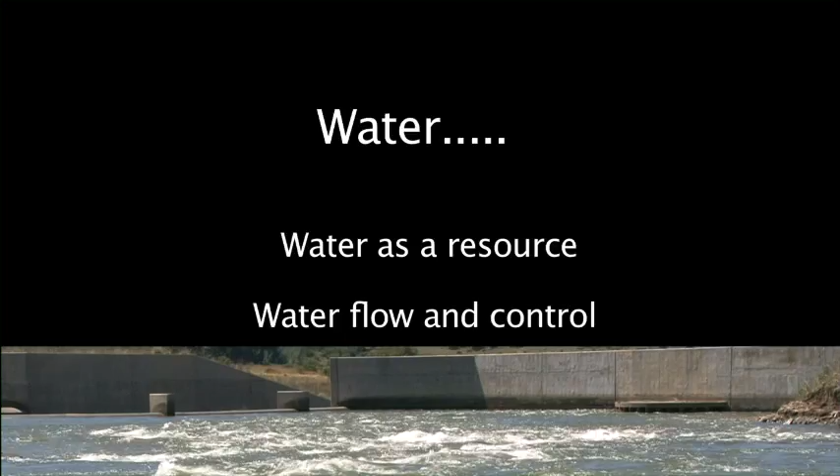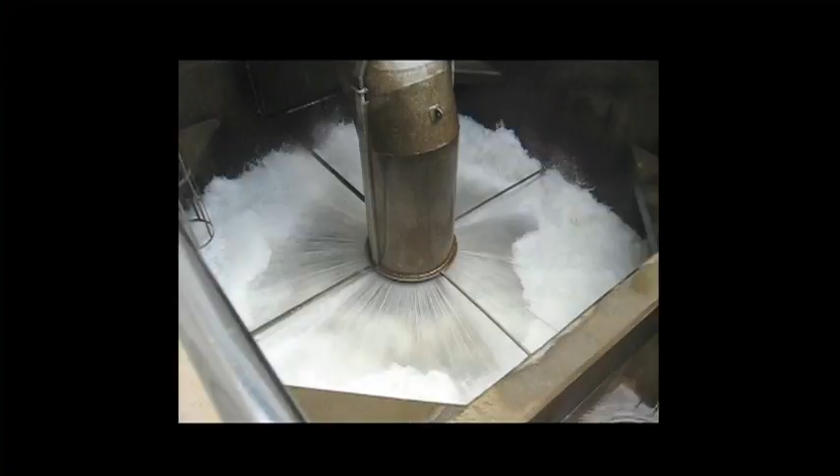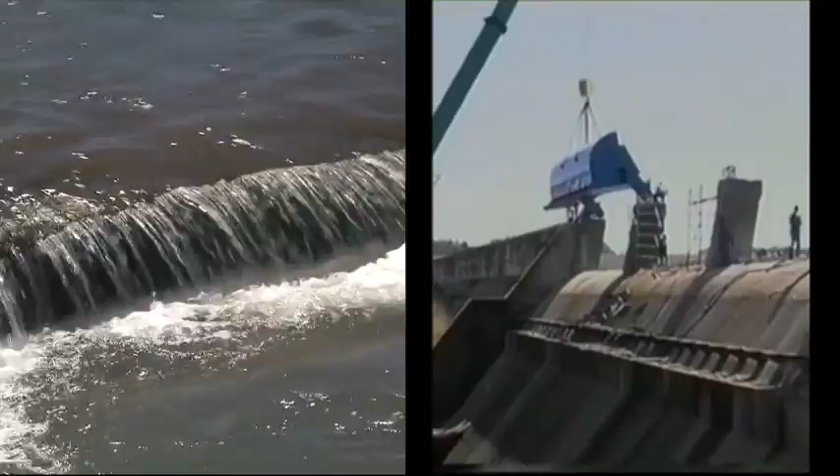I'm Peter Townsend, a qualified civil engineer. I graduated in 1969 from the University of Natal. Most of my life has been spent with consulting engineers, doing a variety of work, broad-based experience from civil and structural work. But more recently, over the last 20-25 years, I've had an interest and a passion for water and for water control. Through that passion, we've developed a range of automatic water control equipment, which is unique in the world and developed in this country.

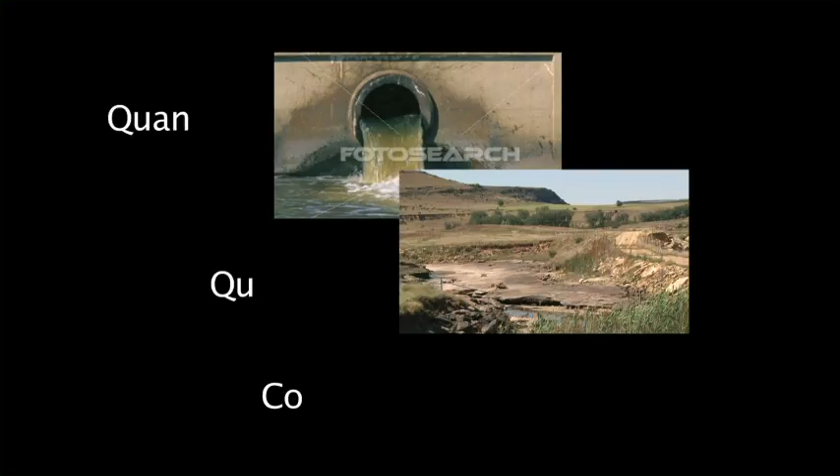Well Johan, that's a very controversial subject because we are in a state of crisis, impending crisis, and it's only recently that the government and the public have realized this and are taking steps toward it. Generally, I could refer to our water condition as the 3 Ks: quality, quantity, and consumption. These are the 3 main areas that we need to focus on, areas where we have crisis in this country. South Africa is not really a water-rich country.

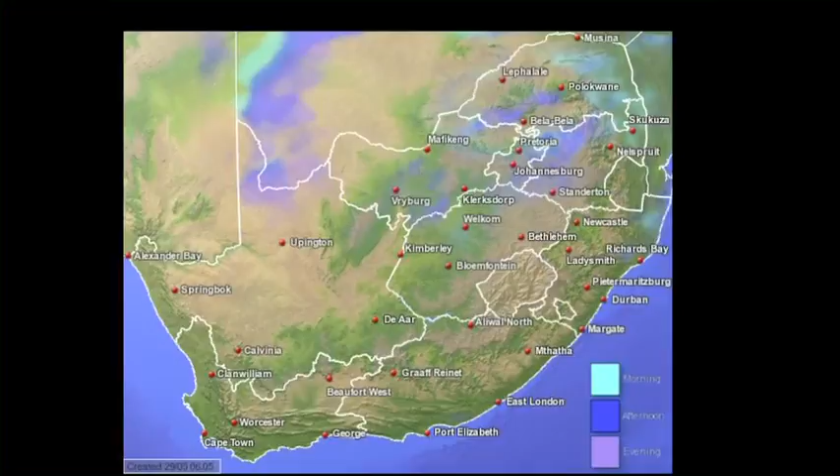We have an average rainfall of less than 500 millimeters across the country, and the water that we do have is usually in areas where we don't need it, and vice versa. So consequently, we are a country which has diverse rainfall going from west to east and to the coast, and we find that the rainfall we need in the dense industrial areas where demand is highest is usually where we don't have sufficient water.

There's an increasing demand in South Africa for water. This is obviously due to increased population over the years, and the government's policy, correctly, is to try and provide clean, safe water to all the inhabitants of this country. That's going to be a large demand on our water resources. Then, in addition to that, there's an increased standard of living, and with that comes an increased water usage.

From the very rural people who have to go and fetch their water from the local stream - they are probably the most efficient water users - to the affluent environments that we have in urban areas where water can be irrigating on the lawns day and night. So with the increase in wealth and living conditions goes the increase in water consumption.

Yes, there are figures that have been bandied about, ranging from 2 to 5 rand a cubic meter, depending on the size of the desalination plant. It is very energy consumptive, although the more recent technology of reverse osmosis does have a recovery of energy. But nevertheless, it is a costly exercise - a costly process to get water from the sea, more so than water from dams and from rivers.

What skews the public perception at the moment is up here in the Gauteng area and the Highveld area - we've had good rains this year, extremely good rains. It's very hard for people to imagine that we're going to have a water shortage. However, in the Eastern Cape, Port Elizabeth area, they are in the grips of a dry period. Their municipal dams are only sitting just over a third full, when they should be substantially fuller than that.

And so that is the problem in this country, that we have this difference in areas - some very wet, some very dry. In this area, which is the hub of the industrial area of South Africa, it is predicted that we are running into a problem in that we are already exceeding the capacity of the Vaal River system.

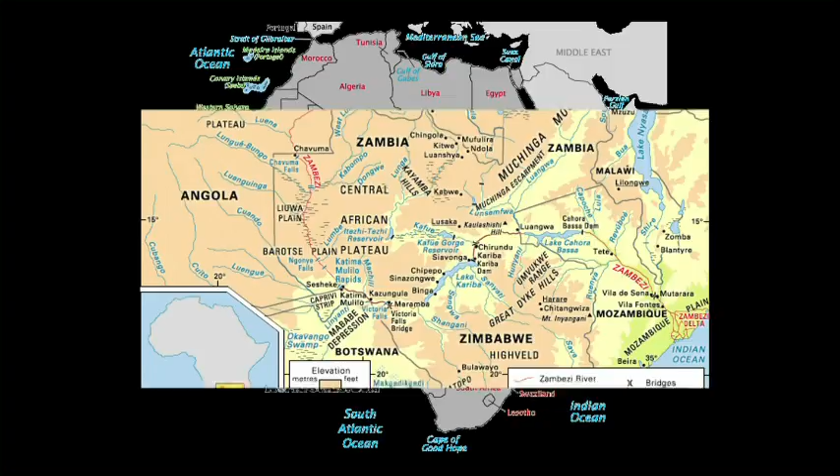And we may have to look north to our northern countries where they will get more water. As far as global warming is concerned, the pundits, the climatologists, are predicting that we get less rain for areas south of the Zambezi and more rain for areas north of that. Already there are indications in some of the rainfall and runoff figures over a long period of time that we are getting less rain, and in addition to that, more severe rainstorms. So the intensity of the rains is increasing, and with it come other problems associated with runoff and floods, etc.

The quality is constantly deteriorating, and there are essentially 3 or 4 sources that contribute to that. The one that is most topical at the moment is acid mine drainage, which we can talk about a little later.

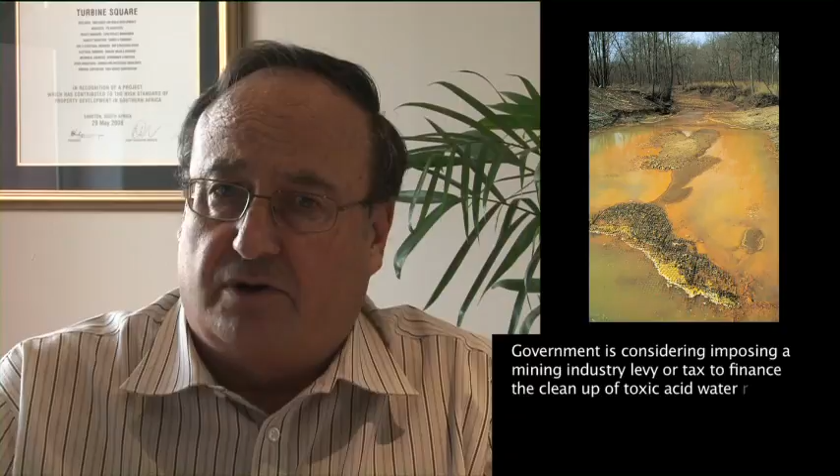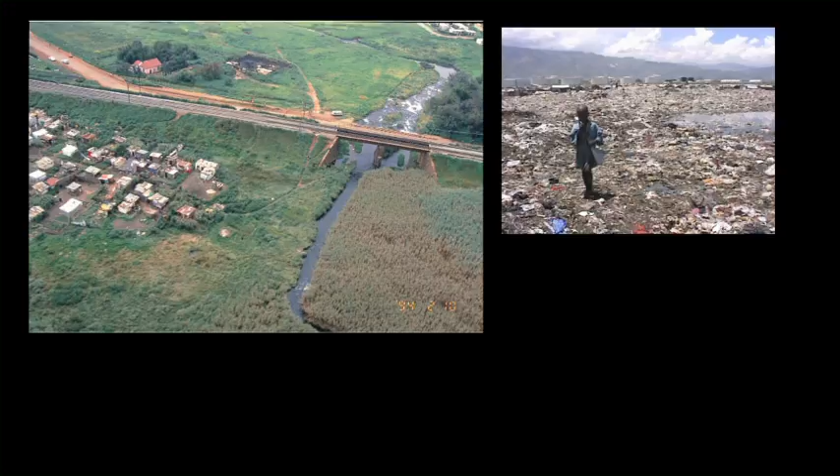The other is the uncontrolled and unpoliced discharge by industry and mines into the watercourses. This is due to a lack of adequate policing, which the Department of Water Affairs admits, since they don't have enough people to police these discharges. Then there are informal squatter settlements, which naturally set themselves up near watercourses because that's where their water comes from, and with that, their waste and refuse and debris ends up in the watercourse, adding to the deterioration of water quality.

And obviously, as we see blocked sewers, overflowing sewers running down the roads into the stormwater system and into the watercourses and our rivers, all that adds to the fact that our water quality is deteriorating and is beginning to have adverse effects, not only on human health, which is probably the primary one, but also on industry.

A lot of the rivers serve as the main source for irrigation, for edible crops or for deciduous fruit, and the fact that we may be using polluted water could actually jeopardize our overseas markets. It has been said that could be a case, especially in the Western Cape. So consequently, water quality is a major issue, and we need to look at it.

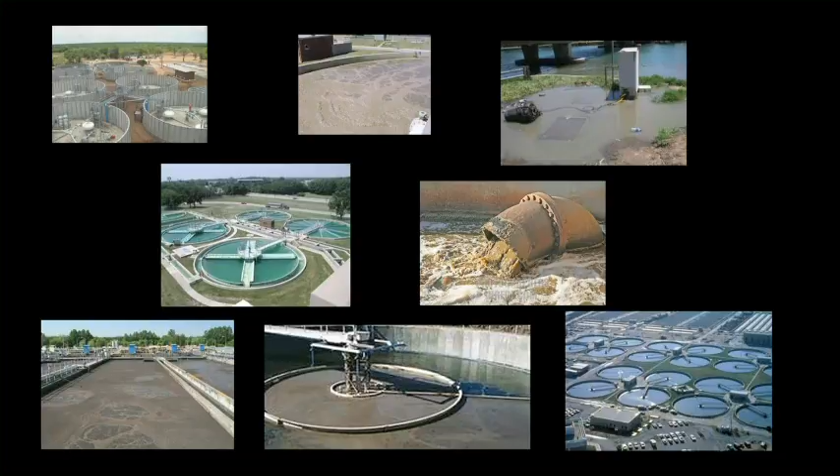We have a lot of smaller municipalities who are not able to adequately treat their sewage, either from a lack of technical skills or whatever. They don't have the ability to maintain the treatment works in the state they should, and a lot of partially or even raw sewage is discharged into the watercourses.

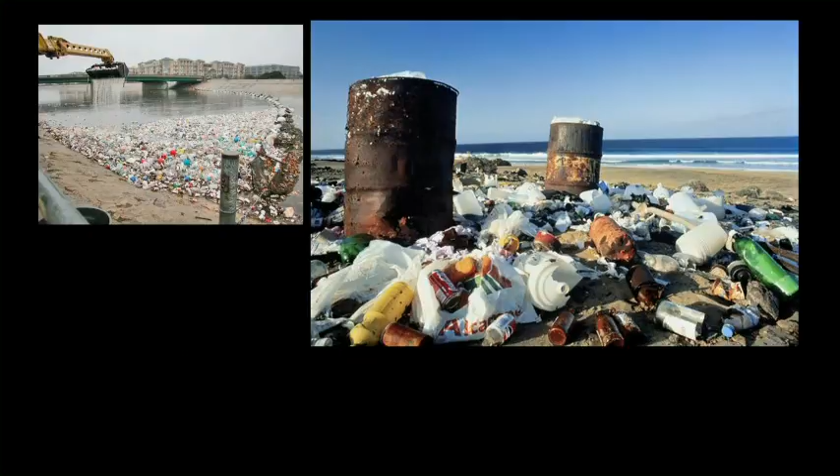Like there is for the energy crisis, we see it on TVs, there's more of an awareness of it, but there's not that level of awareness being brought to the public for polluting. There's still a lot of litter strewn around the streets, which ends up in the watercourses, which biodegrades and adds to the nutrient load in it.

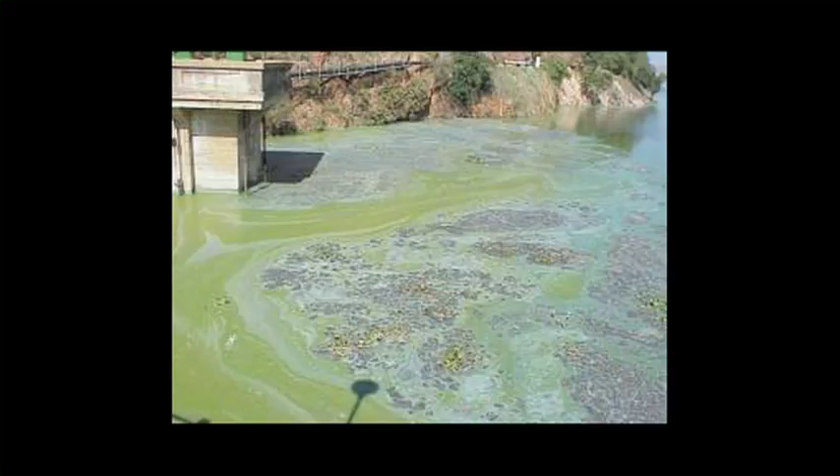And Hartbeespoort Dam is an example of maybe the biggest maturation pond in the world. So that's one aspect.

But the other engineering solution that we may go for is to try and remove the mechanically operated sewage plants and go for a more natural type of treatment, such as reed beds, which work very well at treating the water to the standard where they can be released into the watercourses. It's a non-mechanical process, and I believe it has a lot of potential in this country.

However, we need to get the municipality's mindset along the lines of just using a natural way of treating sewage.

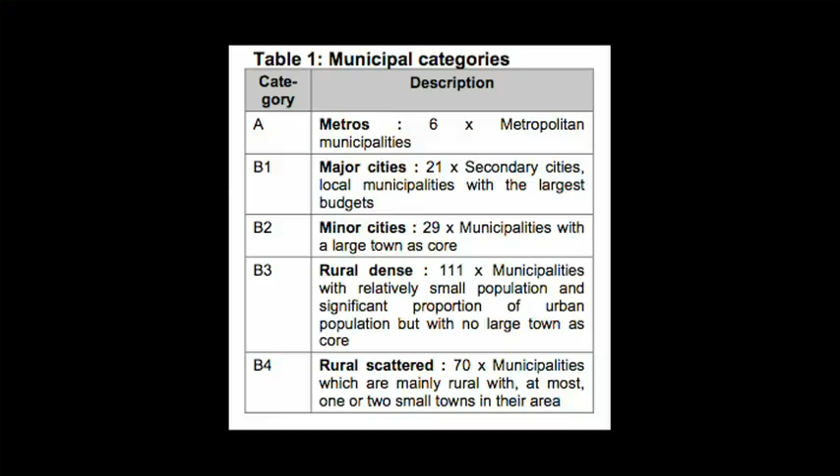Now, it's general knowledge that the municipalities have losses which may vary from as little as 25% up to 60 or 70% or higher. Some of them don't even know what their losses are. And this is valuable water which is just being returned to the watercourses and is being lost. So we need to recover and reduce those losses.

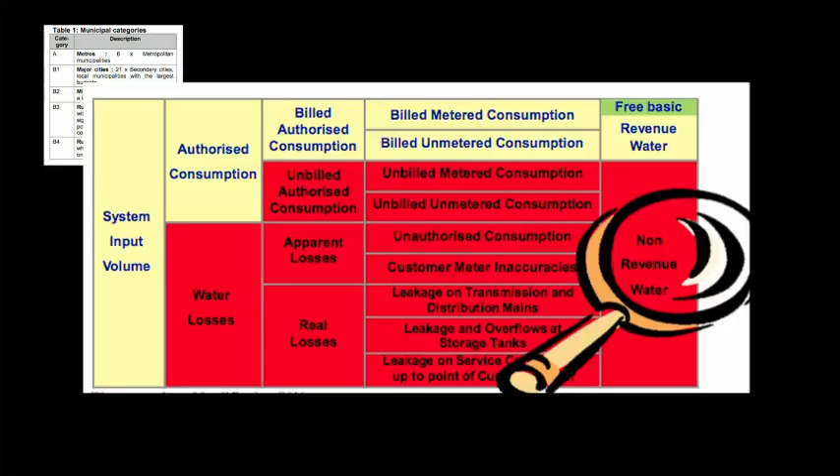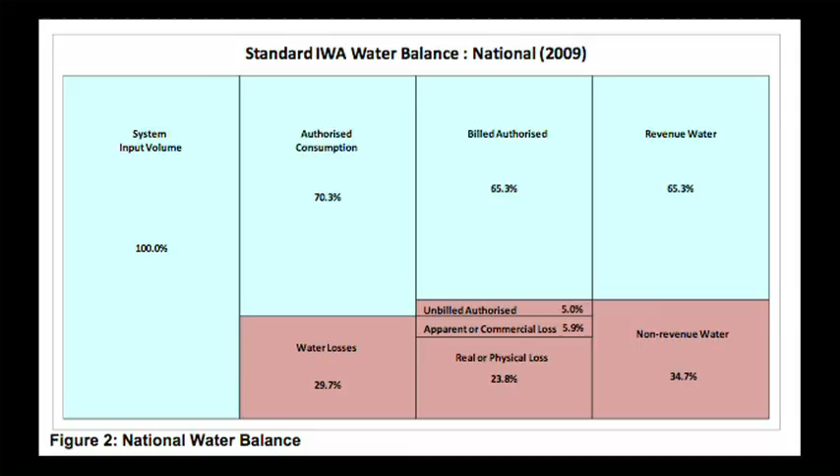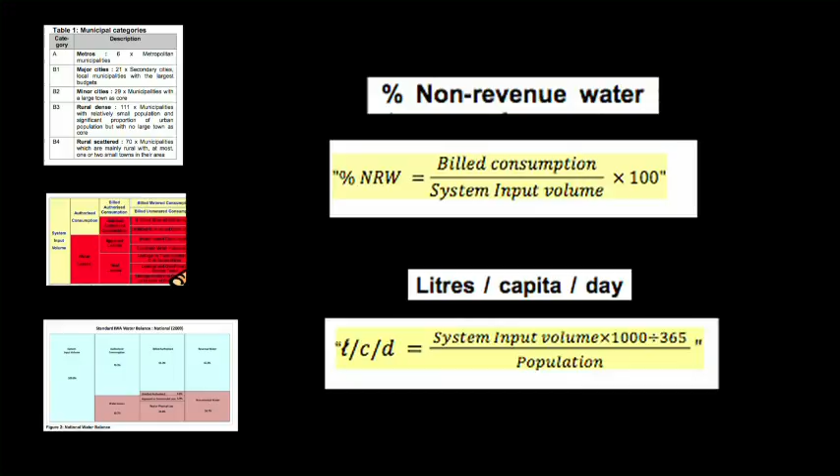If we were able to just reduce losses in the Gauteng area, we may be able to span the time before phase 2 of the Lesotho Highlands Water Scheme comes into operation. So we need to spend a lot of money on it, and already the Gauteng provincial government will be spending more than 50 to 100 million rand on improving existing infrastructure and water supply.

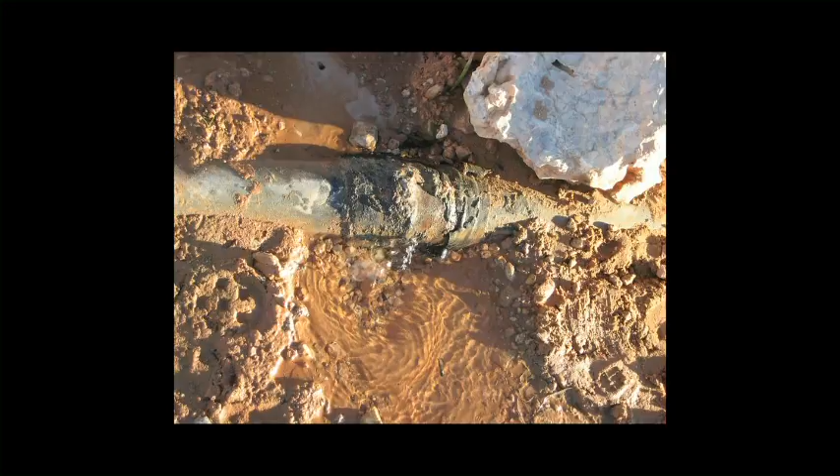The losses can be attributed to old pipes and valve systems in the cities. A lot of them are buried under major roads and in CBD areas which are difficult to get to. It's not an easy thing to replace those.

In addition, the pipe network systems, some of them operate under unnecessarily high pressures, and even a pinprick of a leak under high pressure will lose water. Whereas if you can reduce that pressure by a few bars, that leak will reduce substantially. So pressure management is also important. There are companies that monitor this, and they're doing a good job at reducing the losses in these municipalities.

And then the other problem is insufficient skills and resources to react quickly to a burst pipe. The public are urged to contact the municipality as soon as they see a leak occurring or a burst pipe. Overflowing reservoirs is another area of loss, where the control valves are not functioning properly.

And then the old problem of illegal connections to get water for free. As it has been a problem for electricity, so it is with water. There are a lot of illegal connections, and even the municipality of Durban is offering a period of grace for people to come clean on their water, because they will be found out and penalized. So they need to be reduced as well, because that's an under-recovery of costs, of the expenses. And without those recoveries, those people who are paying will be paying more for water.

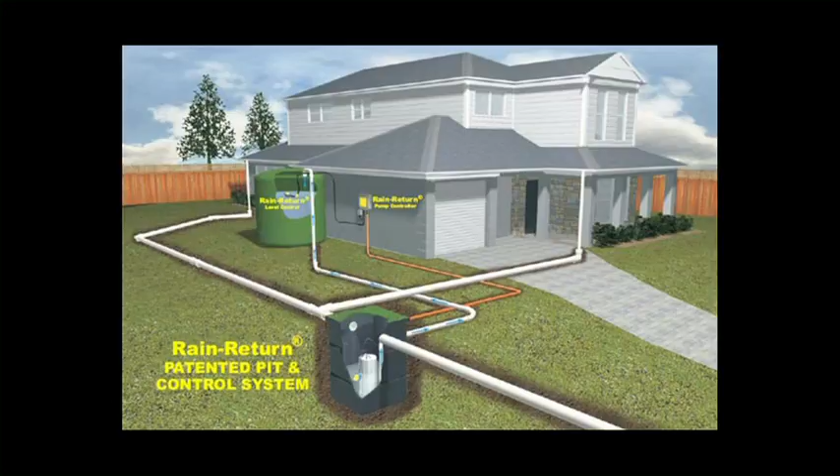Because of our impending crisis for water supply and demand, we as the public should take certain measures to reduce our consumption or reuse water as much as possible. Rain harvesting, which is becoming more fashionable now, essentially just the storage of rainwater, is an effective way of doing it, and more companies, new buildings that are going up, green buildings, incorporate the principle of rain harvesting.

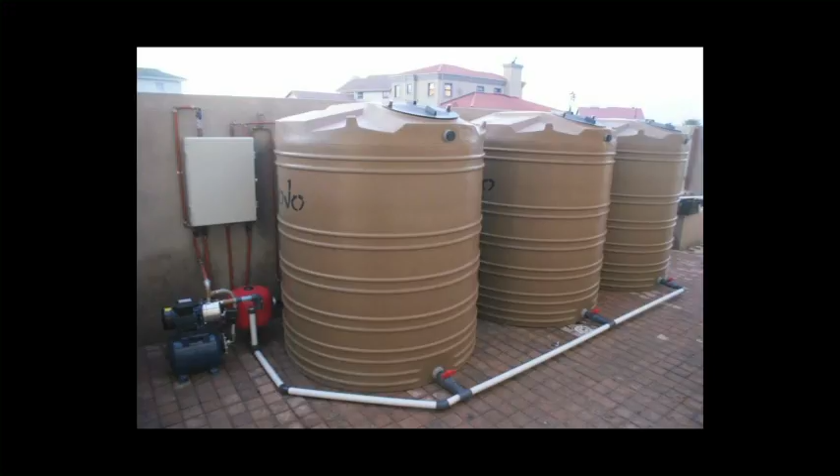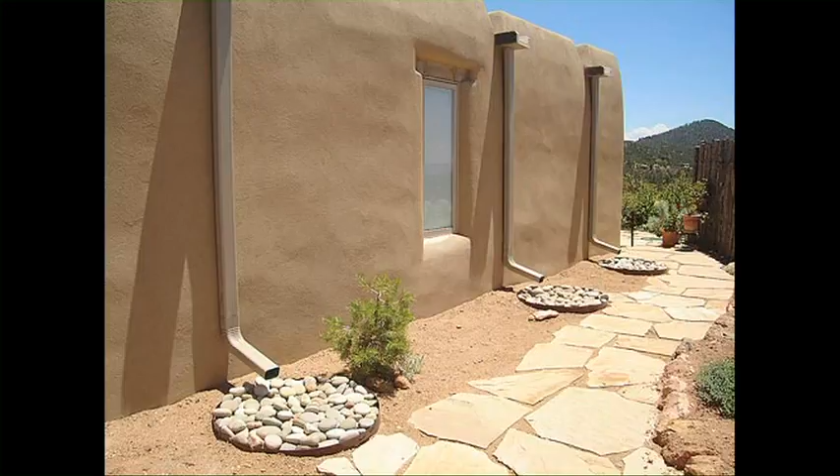On private properties, we should try and harvest as much of the runoff from our roofs as possible. The other is to use grey water from the bath or the wash hand basin, and either store it or lead it directly onto your lawn or garden as a water saving measure. There are some companies which collect that, can treat it slightly, and put it back into the cisterns, so that becomes the flushing water for the toilets.

We need to get away from this practice of washing down driveways and hard stand areas. It's an easy way of doing it, but it's wasting water. We need to do it the hard way and sweep it out. We are quite extravagant the way we use good, fresh, clean water to irrigate our lawns and so on. There are a number of ingenious methods going around at the moment, even planting gardens with drier species of things, more indigenous plants which take less water. There are a lot of those around as well, but we need to be aware of the value of water and start reducing that.

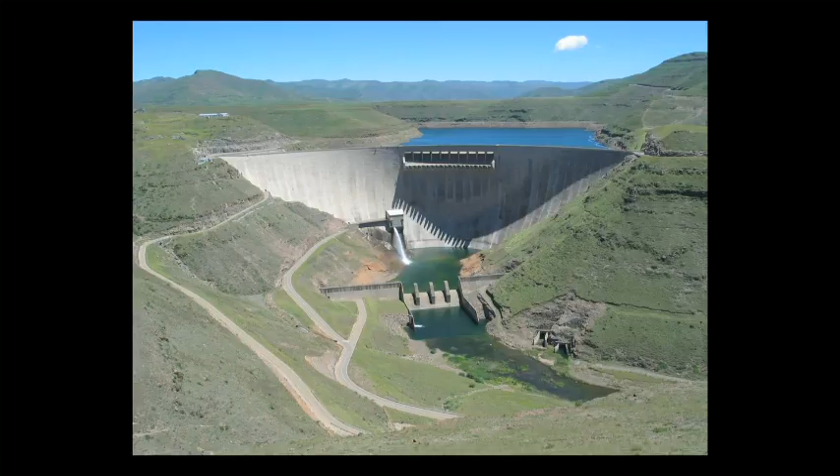Well, to build a new dam is both costly and very time consuming, but probably more so, it has a lot of environmental problems associated with it. It's probably easier to raise a dam by a couple of meters to win between 15 or maybe even 50% extra capacity in the dam. And if you do that to 3 or 4 dams, it's effectively the same as building one new dam.

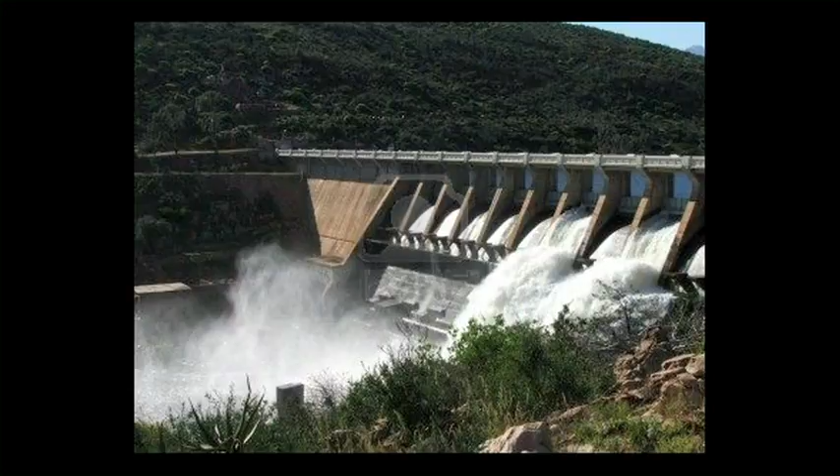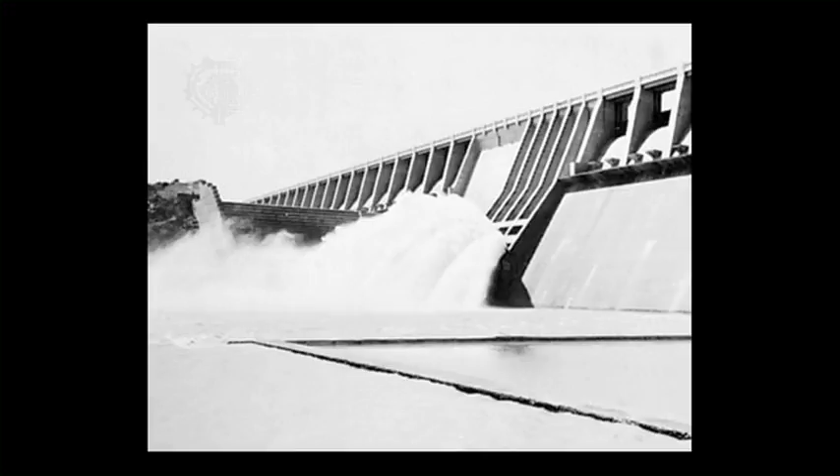The majority of our dams in this country are probably more than 40 to 50 years old, or even older, and they have accumulated sediment. On average, about 25 to 30% of our total storage capacity has been lost to sediment. And so that is an additional loss on our water supply. Just to compensate for the loss in storage due to sedimentation, we should look at raising our dams.

In addition to raising an existing dam conventionally - I call it conventionally - there are environmental issues because you invariably require considerable quantities of fill, and that means quarrying, it means increased transport, and the environmentalists always find a way of increasing the negative impact of doing such a thing. Whereas installing gates, the gates are manufactured in a controlled environment, in a workshop, with quality control, and the site involvement is purely one of installing them on the dam. The environmental impact is minimal compared to conventional raising.

However, I do re-stress that if you can get away with increasing the capacity with an ungated spillway in this country, we should do it.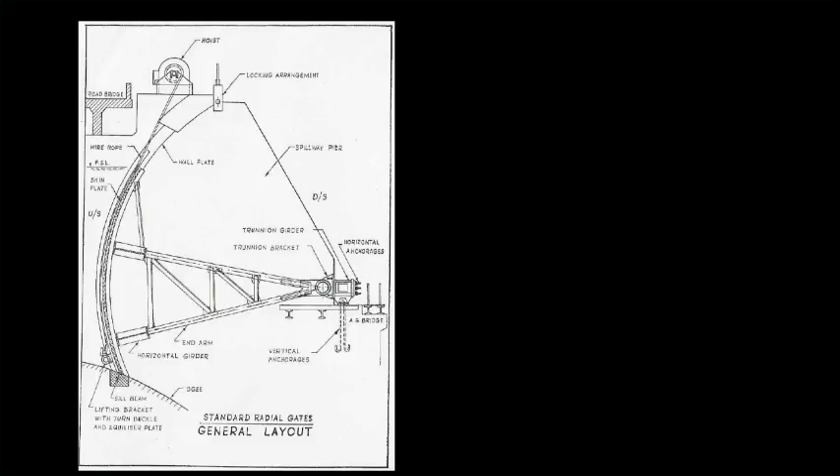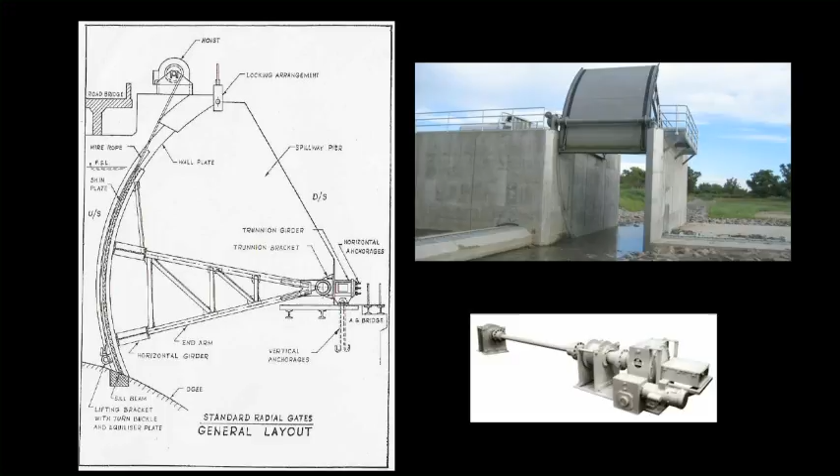The main reason why there has been somewhat of an adverse tendency to go for gates on spillways is because traditionally the spillways have utilized electrically or mechanically driven gates. Most of them are radial gates, but there are also vertical roller gates. And some of these are stuck, they're just not working anymore. That can be put down to a number of reasons: corrosion, but generally lack of maintenance. And because of that, these gates, when they're required to work, don't work. They're either stuck or they just don't work. They haven't been maintained.

So the safer way is to try and build a dam without gates. However, there is a new generation of gates which are automatic, which don't require any electrical or mechanical input. Where the dam conditions dictate that a gate's required, we should look at automatic gates because it eliminates some of the problems associated with electrically driven gates.

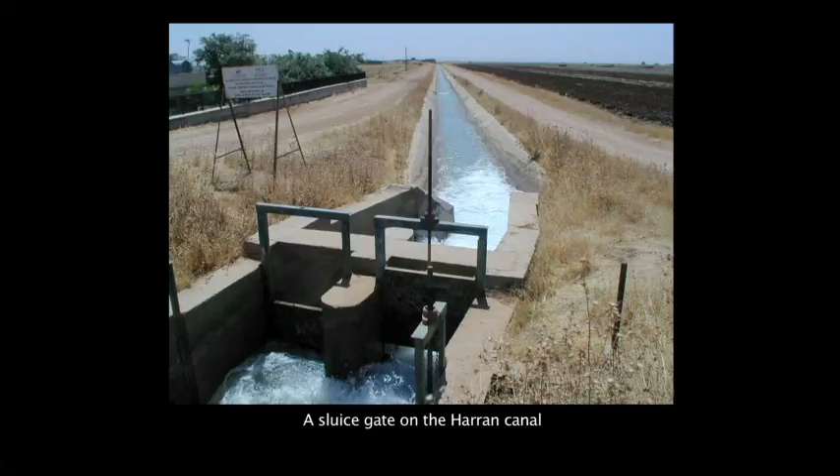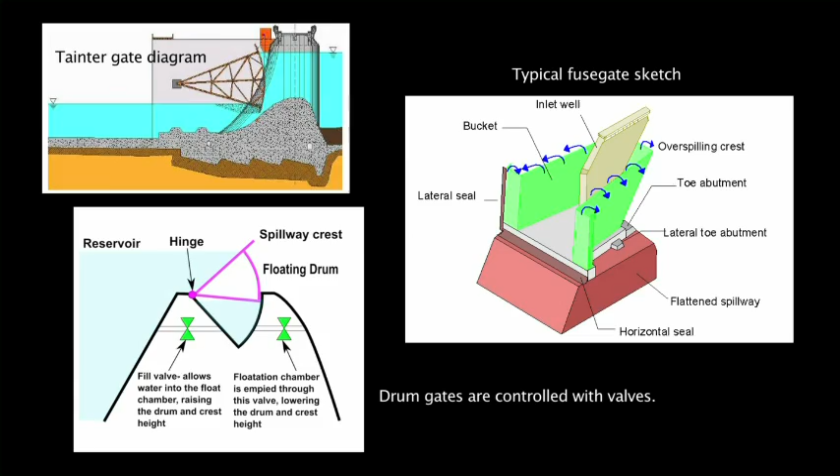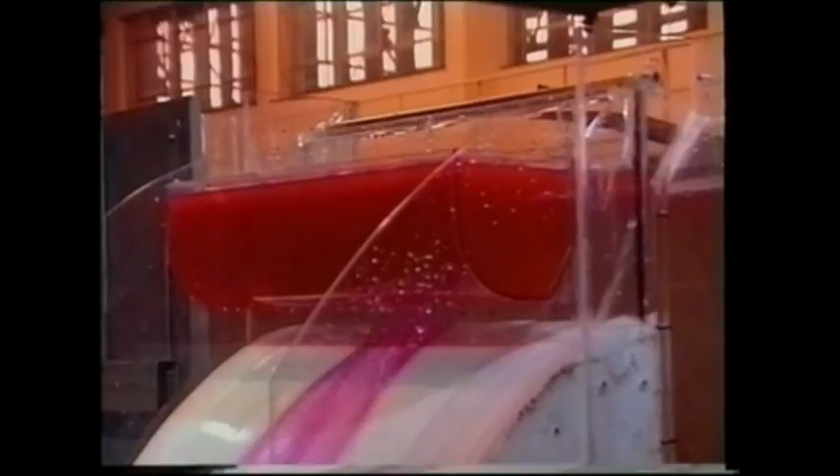Fully tested by independent universities, our TOPS gate offers a quick and affordable solution to increasing water level in dams, from as little as 0.75 meters to a whopping 6 meters. The gate will open automatically as the water level rises in the dam when a flood passes through it, and will close again automatically once the flood has passed, retaining the increased water level. Easy, straightforward and uncomplicated. That's the flow gate solution.

The gate is closed while the water level in the dam is rising. Note that the water level in the ballast tank rises as well. The weight of the ballast tank will ensure that the gate remains closed right up to the full supply level of the dam. Should the water level rise above increased full supply level, water will overflow to the front closure plate while the gate remains closed.

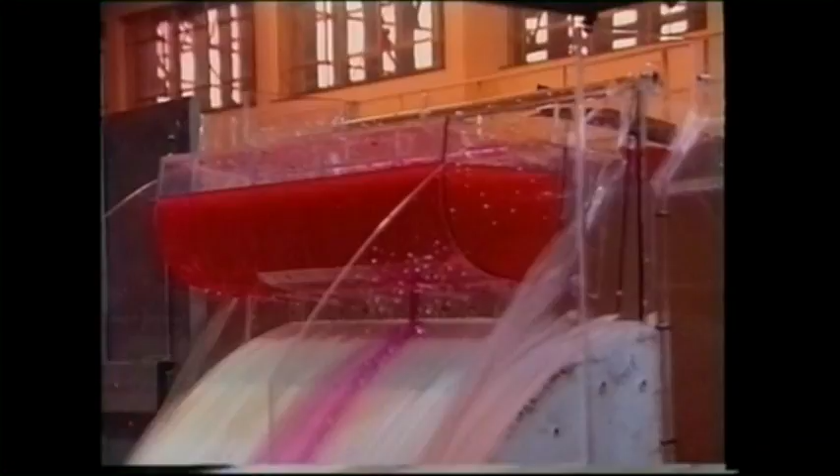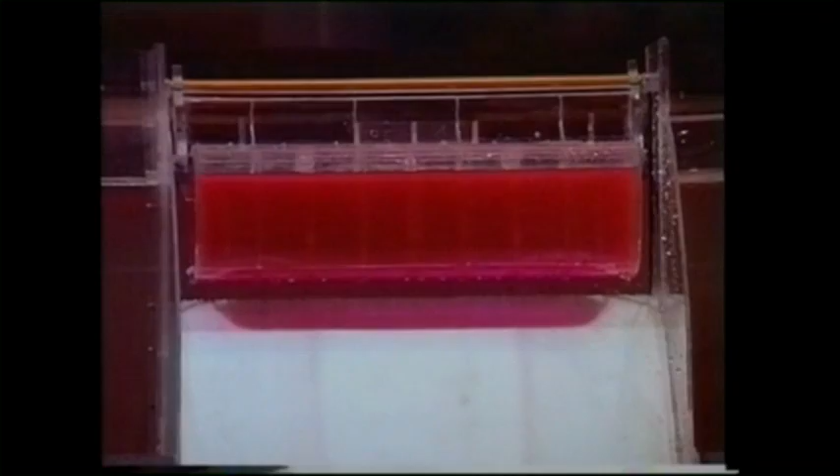As the upstream water level rises even higher, the gate rotates upwards to pass the flood water. As the flood recedes, the gate rotates back to its fully closed position, with the dam now filled to its new enlarged capacity provided by the celebrated TOPS automatic spillway gate.

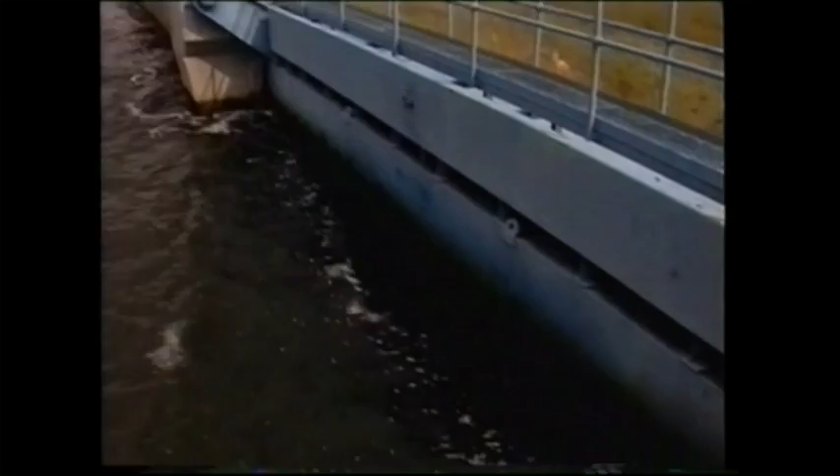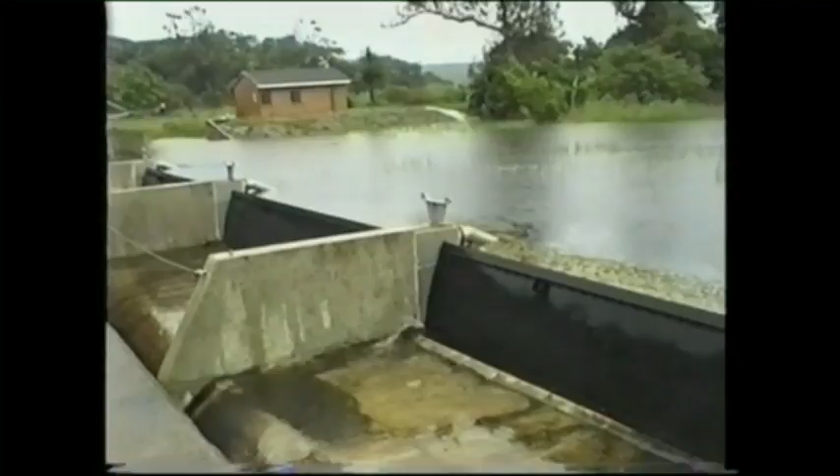This gate is installed on the crest of a weir or dam to implement storage and flood control. It provides an economical increase in storage capacity without raising the dam wall and without increasing the maximum permissible flood level. Debris control, screening and scouring are all effectively and efficiently handled.

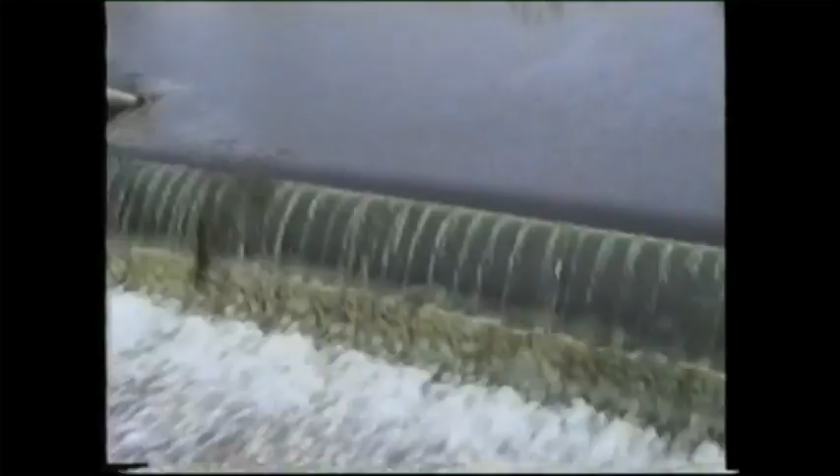Under normal conditions, the buoyancy tank acts as the gate, which retains the increased water level. With floodwater rising and inflow into the weir, the weight of water will rotate the crest gate downward to allow a controlled flow over the spillway.

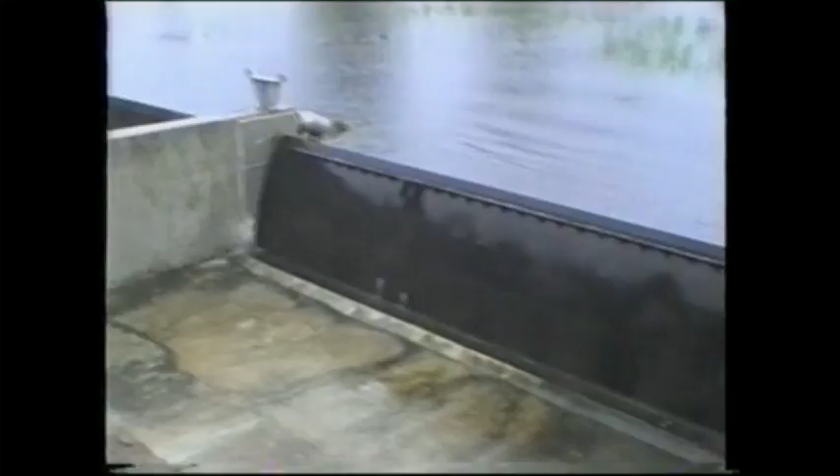During peak flood conditions, the crest gate will automatically move to its fully submerged position to allow maximum flow from the spillway. Finally, as the flood recedes, the buoyancy tank will empty and the gate will float at its closed position to retain the increased supply level.

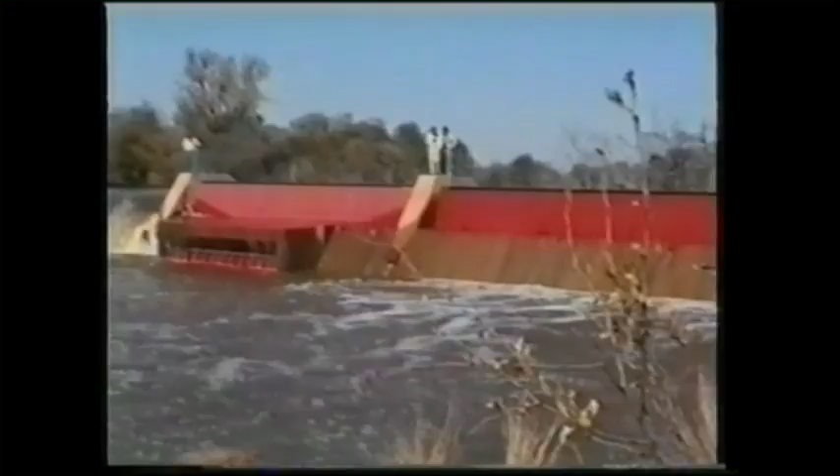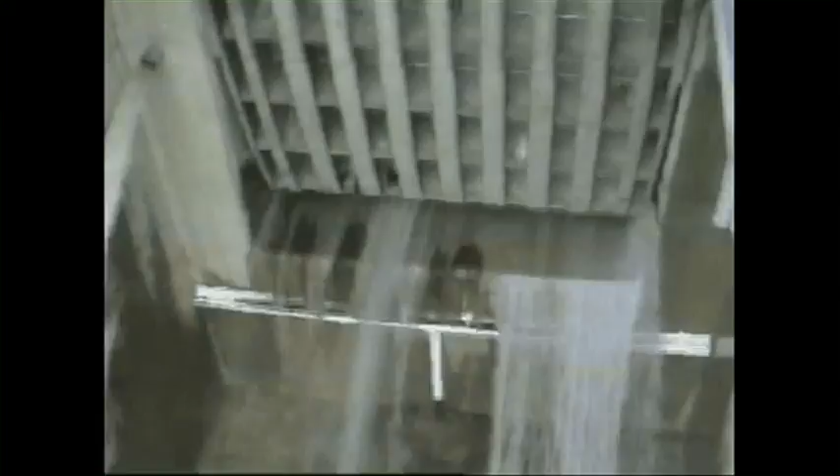Our scour gate is installed in the lower levels of a weir or dam to provide scouring, flood control and water regulation. In a canal system, it will ensure automatic rejection of excess flow as well as sediment.

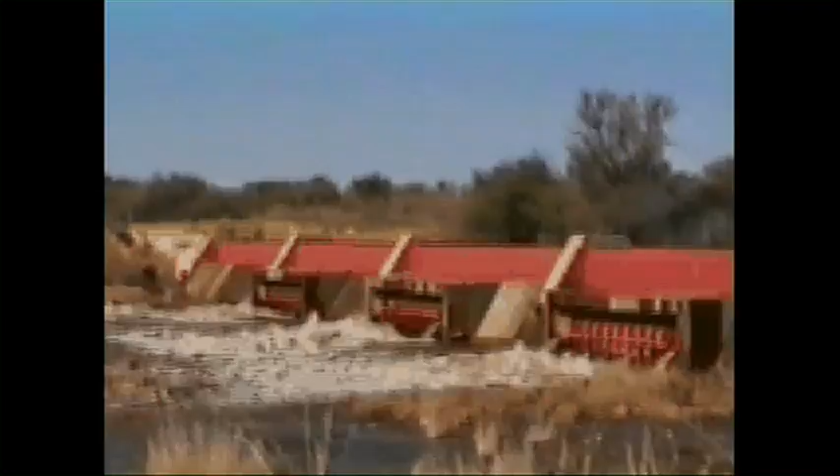Designed to control a constant but adjustable downstream water level with a widely varying level upstream, this automatic diaphragm valve has a proven accuracy of control better than required in normal practice. The valve can be used in diversion works, reservoir inlets, river offtakes, dam outlets and canals for water apportionment in standard upstream variations from 0.3 meters to 40 meters.

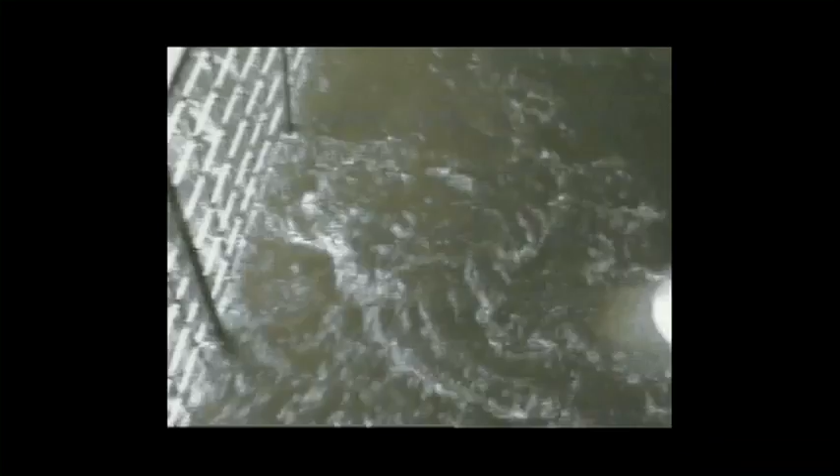It can be manually operated and locked to prevent tampering by unauthorized persons.

As far as the history of the gates and the water control equipment is concerned, this can all be attributed to Mr. Laurie Turner, who back in the 1960s, a farmer in the Eastern Cape, a very innovative man, had the Orange River fish canal system flowing through his farm and wanted to irrigate from it. But he realized that the water needs to be controlled and made inquiries with the Department of Water Affairs as to what equipment they used, which at that stage was purely manual slide gates.

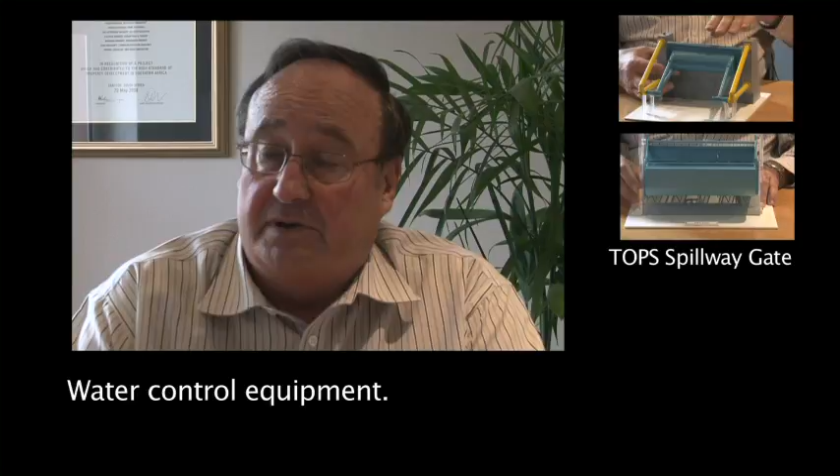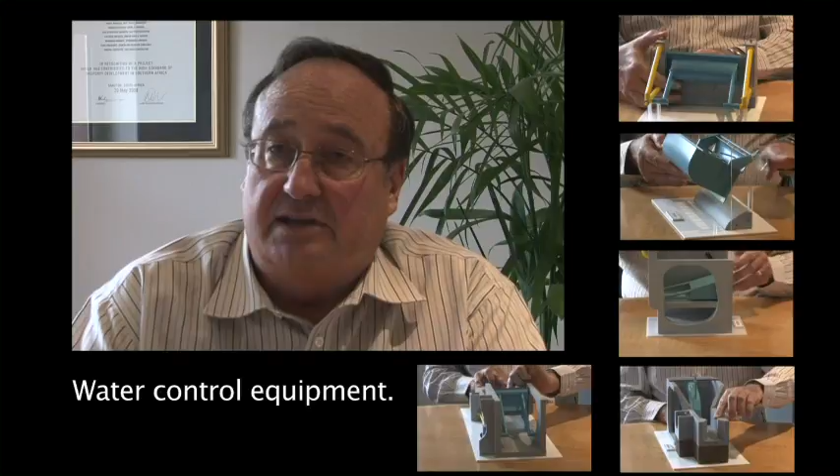He researched overseas equipment. There were some French products which he looked at and thought he could do better. And consequently, with some introduction from an overseas person in America, was able to develop the diaphragm valve. Further than that, the weir across the Little Fish River would silt up, and did silt up into the offtake canal, to the point where it was actually jeopardizing the whole irrigation scheme. And he then consequently came up with the Scour Gate and the Crest Gates.

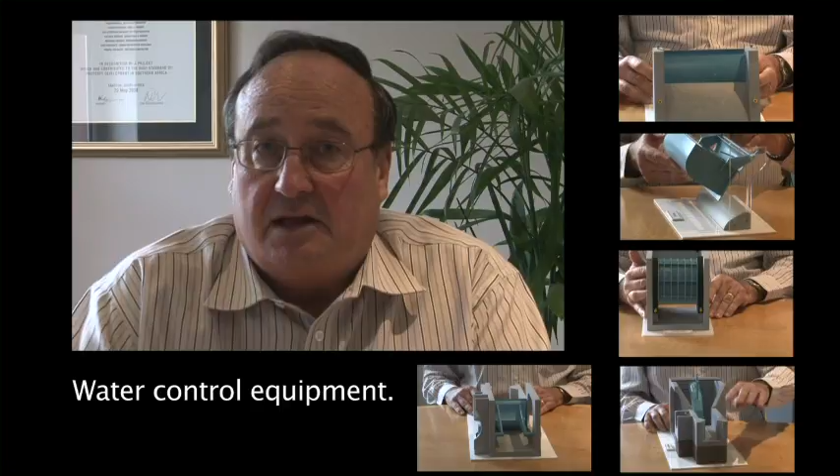So all these gates have been developed in South Africa by a person with no technical background, but just a very practical person. That technology was then handed over to engineers, and myself, together with Brian Middleton, were one of the earlier pioneers of the equipment. This goes back to the 1960s.

The first regulating gate in Patensie on the Gamtoos irrigation scheme was installed in 1967. So you can see it goes back a long time. And it's still working today. It's only been taken out once for a recoating, but it's still working perfectly well. And we've just added a bit more engineering to it, but the concept is simple.

It's designed for African conditions, where it can stay in a remote area. It can handle the climatic conditions, the floods, the hot weather, and the debris. A feature of this equipment is that it has been designed to handle the debris loads that we get in our rivers and irrigation schemes, and the dirty water.

And so consequently, it's designed for Africa, but the technology has found a lot of interest in other parts of the world as well for irrigation schemes. And we now have equipment installed in Africa, in Uganda, Zambia, Zimbabwe, Swaziland, Namibia, and more recently Peru, as well as Crest Gates in Australia. So the equipment has found a considerable amount of interest around the world.